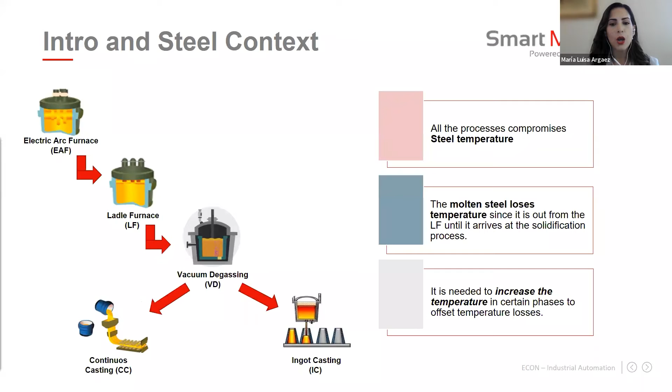Well, but how do we compensate for temperature losses since the steel is out from the ladle furnace? We compensate for temperature losses by giving a superheat to the molten steel in the ladle furnace to guarantee an optimum steel temperature to the final casting process. It is well known that the superheat in the steel is the difference between the steel temperature in the tundish and the liquidus temperature. Therefore, ensuring compliance with the superheat in the tundish zone within the range of 15 to 30 Celsius degrees is one of the key objectives to maintain a high quality of the final product.

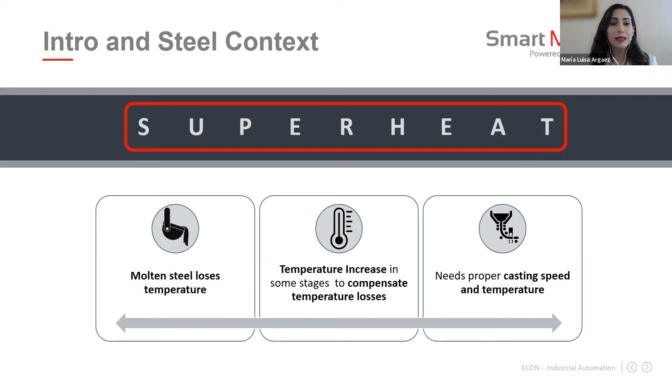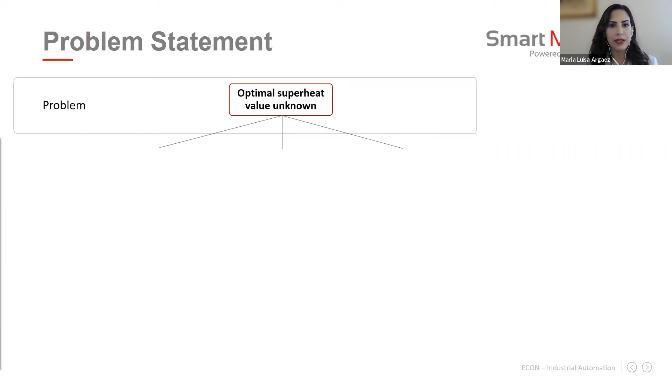Now let's discuss the project problem statement. The main problem is that the superheat value is unknown and it is given typically by the operator's experience. So temperature samples are taken during the whole process, specifically in the tundish, to adjust the CCM speed. Nevertheless, sometimes those measurements are not made in a timely manner. Therefore, not knowing the appropriate superheat value to give to the molten steel causes still low or high superheat. So the CCM speed is manipulated to compensate for the superheat variation. And this produces issues regarding quality compliance and operative problems.

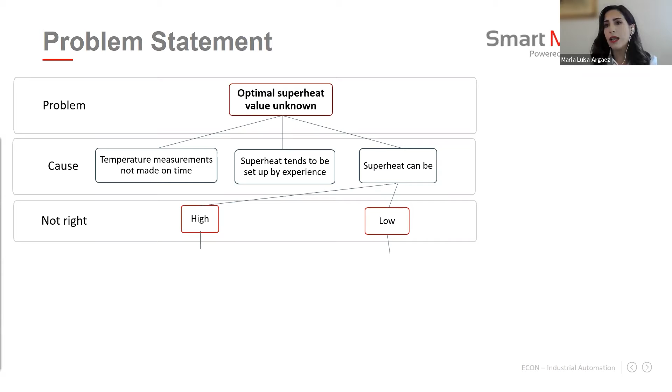For instance, when we have a high superheat, it means that the steel temperature is higher than the optimum, and it can be compensated by decreasing the CCM speed, but this produces a very thin solidified layer and breakage in the mold in the solidified product. On the contrary, when we have a low superheat, it means that the steel temperature is below the optimum for the casting process, and it can be compensated by incrementing the CCM speed. But this can cause non-metallic inclusions. And non-metallic inclusions can compromise the ductility of the solidified product and thus its mechanical properties.

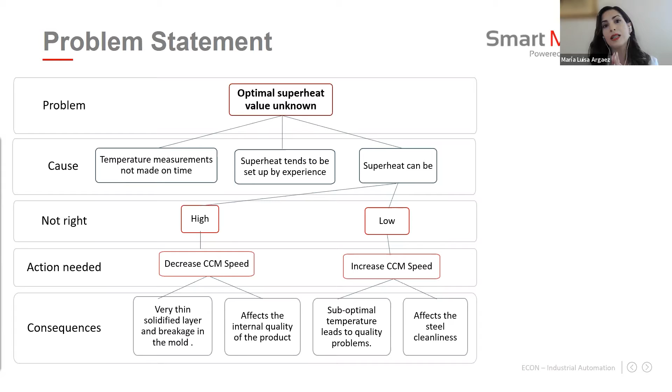Now let's talk about the energy consumption in the steelworks. Due to elevated temperature in the steelworks, there can be high energy consumption, specifically in the electric furnace and in the ladle furnace. For those reasons, it is necessary to know in advance the features that affect the superheat and the superheat that must be given to the steel in the ladle furnace to arrive at the tundish with proper temperature. And this can be achieved with data analytics, machine learning, digitalization, and domain knowledge. So now let's see the objective of this project.

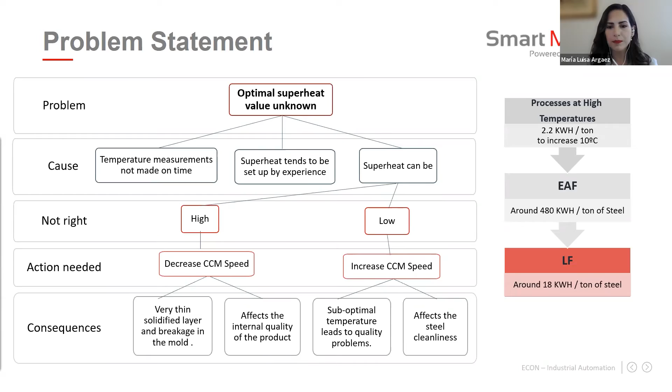Well, here, the main goal is the creation of an artificial intelligence solution to predict the optimal superheat value to give to the molten steel in the ladle furnace to arrive at the tundish with proper temperature. And this solution allows us to achieve a series of benefits.

For example, obtain semi-finished product with adequate quality, avoiding the presence of defects such as cracks and accumulation of pores. Increase furnace productivity by saving time losses that unnecessarily high superheat entails, and making production more efficient by avoiding material discarded due to the presence of defects.

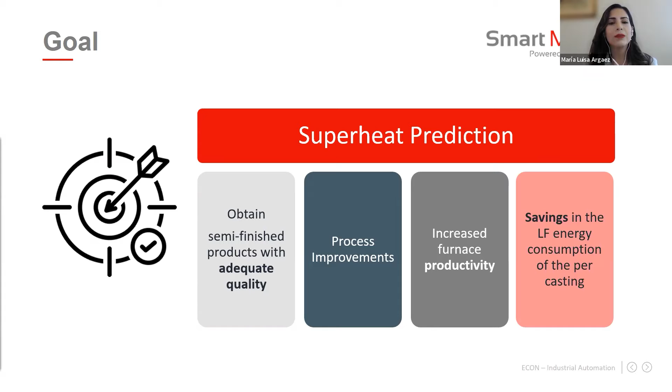Improvement in process control, avoiding variability in the superheat between heat and heat, maintaining optimum CCM speed. And savings in energy consumption in the ladle furnace per heat by avoiding giving an unnecessarily high superheat. All right, now we are going to talk about artificial intelligence, machine learning, and data science.

And deep learning is a subfield of machine learning, which is essentially a neural network with 3 or more layers. This neural network attempts to simulate the behavior of the human brain, allowing it to learn from large amounts of data. There are different ways and kinds of learning for an algorithm to perform tasks autonomously. One of them is supervised learning.

In supervised learning, algorithms work with labeled data, trying to find a function that, given the input condition, can assign the right output label. And the algorithm is trained with historical data and thus learns to assign the right output label to a new value, that is, it predicts the output value. This learning is often used for classification and regression problems.

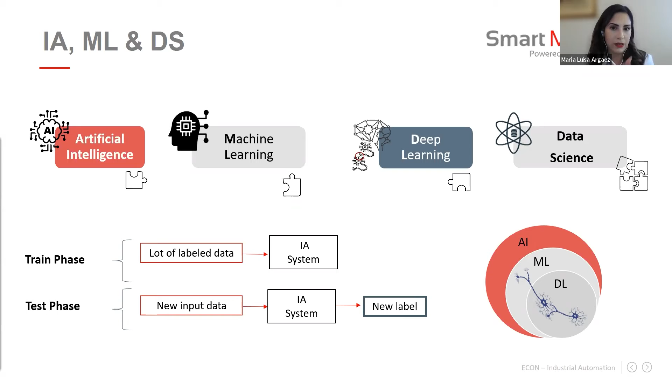And here we can see that machine learning has different kinds of learning, and today we are going to focus on supervised learning. Specifically, this kind of learning has 2 modalities. The first one is regression, which is in charge of predicting a numerical value. And the second one, the classification approach, is in charge of predicting a categorical value. All right.

The data typically is divided into at least two parts, which are called training and test data. With the training data, the algorithm is taught to recognize and learn patterns in the data, so it is possible to make the machine learning model. Later, with the test data, it shows how well it learned to recognize one class from another or to estimate a number given the input conditions.

Additionally, regression analysis is a subfield of machine learning whose goal is to establish the relationship between the features and the output target variable. Here we can mention some machine learning algorithms such as linear regression, non-linear regression, support vector machines and its variations, nearest neighbors, random forests, artificial neural networks, among others.

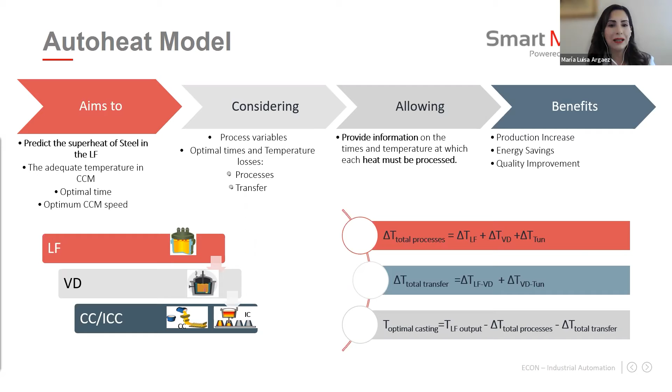The auto-heat model also considers process times in the ladle furnace, VD, and at the tundish. It also considers transfer times from the ladle furnace to the VD and the VD to the tundish. Here we obtain the optimum casting temperature of the heat by subtracting the temperature losses of the total processes as well as the transfer time to the ladle furnace. Considering the above, now I'm going to talk about the architecture of the mathematical model. All right.

Here we can see the auto-heat model. The complete model is divided into two modalities with three submodels. Each submodel is interconnected and dependent on each other. The first section is the forward modality that is in charge of predicting the ladle furnace, vacuum degassing, and the tundish. For each of them, the final temperature.

With the tundish objective temperature and the CCM speed, with the backward modality, we can obtain the final temperature in the VD and in the LF, and the initial temperature in the ladle furnace. Here, it is important to say that the estimation of each model is an input feature to the consecutive model. Each stage has different features like weight, grade, transfer times, additives, among other factors, and descriptions of operational signals.

These features were processed by analyzing them through an exploratory, diagnostic, and inferential data analysis before the predictive data analysis. Because with this kind of analysis, we can see the feature behavior, detect atypical cases, and select the features that have the most impact in the response variable. The features were normalized to prevent features of higher magnitude influencing more than those features with lower magnitude.

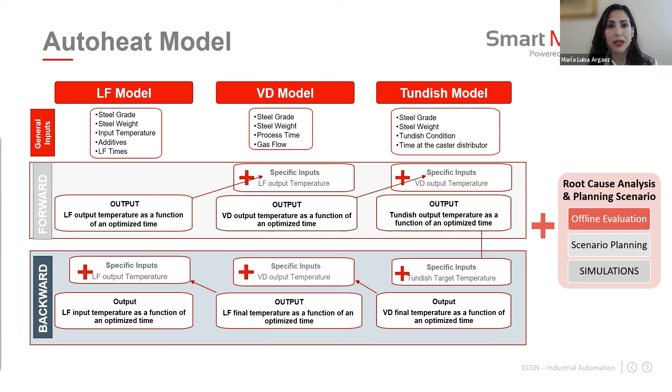In conclusion, with this modeling stage, 14 models and their mean absolute error were compared for each of the 6 models that make the whole superheat model, selecting those models with the lowest mean absolute errors and other model performance factors. Well, now I'm going to talk about the results of the auto-heat model.

By selecting the best parameters and the best data science models with the forward model, we obtain the final temperature estimation in the ladle furnace, in the VD, and at the tundish with a mean absolute error of 5.3, 5.1, and 4.8 Celsius degrees respectively. And with the backward modality, we obtain the final temperature estimation in the VD and in the ladle furnace with a mean absolute error of 4.4 and 1.9 Celsius degrees respectively, and the initial temperature in the ladle furnace with a mean absolute error of 8.7 Celsius degrees.

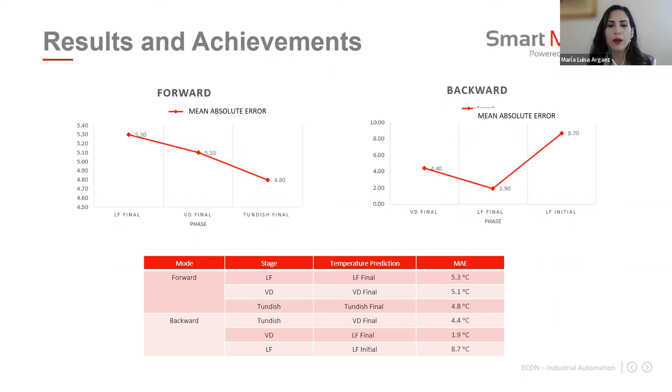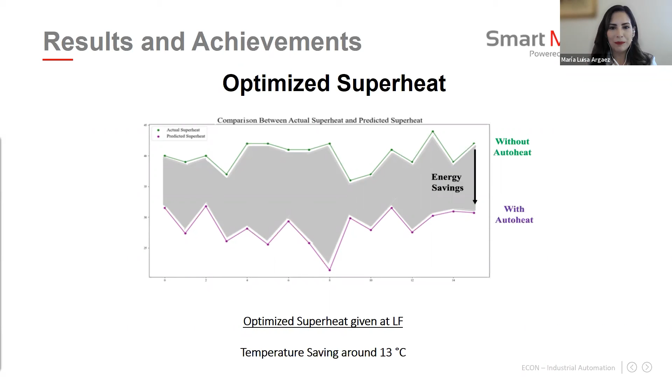So now let's conclude this webinar. Here it is important and essential nowadays to provide new solutions and approaches to share knowledge in the company. The auto-heat model demonstrates good generalization. Therefore, it is suitable for making predictions in the future without supervision. And the mean absolute error was around 5 Celsius degrees in all temperatures. The auto-heat model prediction allows optimizing temperature around 13 Celsius degrees.

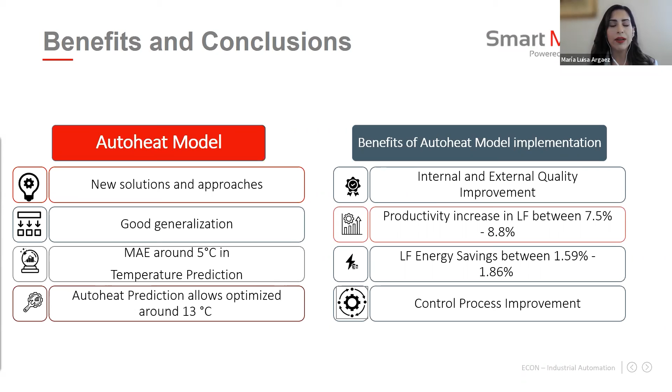Regarding the benefits, we can achieve an internal and external quality improvement, productivity increase in the ladle furnace between 7.5 and 8.8%, LF energy savings between 1.5 and 1.8%, and a better process control. It was a pleasure being here today and sharing these ideas with the steel community and data analytics enthusiasts. We know that artificial intelligence is disrupting our lives and jobs. So let's use it and let's turn our process data into information to achieve better process knowledge.

Thank you, Maria, for your presentation. Now we will answer your questions. We have a question here. What about the return of investment? Okay, the return of investment is usually less than a year, but it also depends on the current plant performance.

Okay, we have another question. Do you have an estimate of time and financial investment of such a project? All right, the time is around 3 to 6 months, but it depends on the steelworks plant. And about the financial investment, it depends on the data acquisition level that the company has. This is fundamental and this is the starting point. That's it.